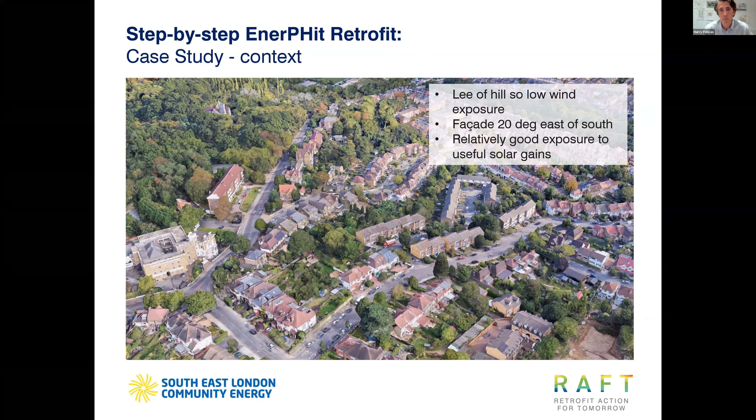There are 3 stories. It was in a poor decorative state. The neighbouring house is lower and staggered, and as I said earlier, the only building regulation requirement was for a little bit of loft insulation. I want to labour this point - I want you to go away from my talk and think about this concept of retrofit ready works.

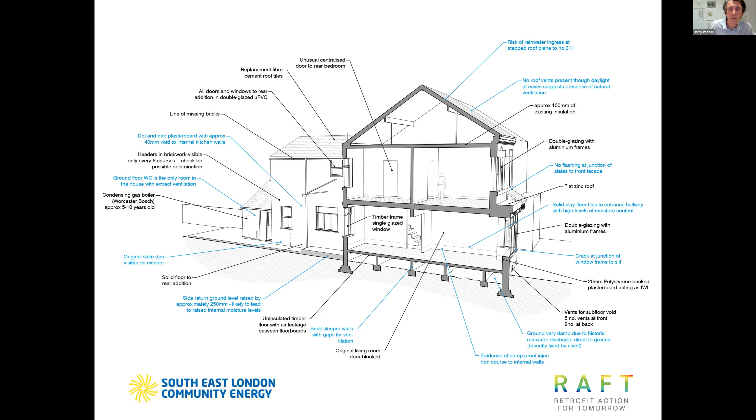And then this is a section of that same project - actually the Bournville retrofit project I mentioned earlier on. So this just shows a preliminary retrofit strategy for the house. It's indicative, a section that shows where insulation will go, roughly how thick it might be, where we might put it, and where difficult junctions are likely to be.

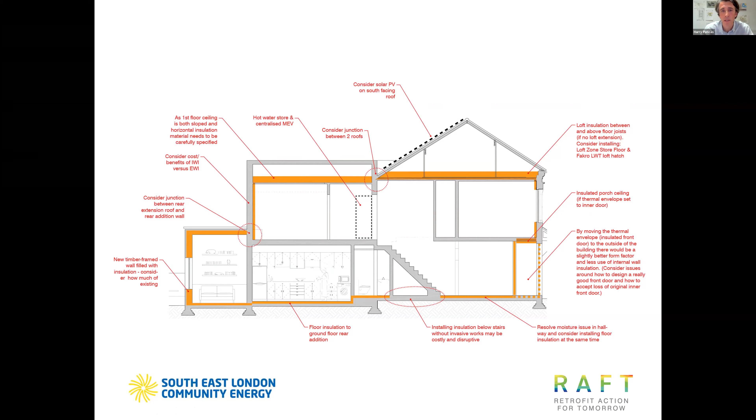Just as a simple thing such as a porch, it's actually quite a challenge. It's quite easy to sort of wrap a box, but a porch actually needs to be insulated on the underside, and then the wall to the inner room also needs to be insulated. So you need to really think it through, and think through junctions and connectivities. Floor to wall and wall to roof insulation details really need a lot of thought.

And it's very heartening to know that after having completed step 3, our measured energy is actually lower than what was predicted by the PHPP. So you might have all heard the phrase 'the performance gap' - it's very common that buildings are designed to do one thing and they actually perform a whole lot worse.

I remember attending an AECB conference a couple of years ago at Oxford Brookes, where the director of estates of Oxford University was talking about their performance gap, and it was something like 200% on buildings built since 1950. I don't remember the exact numbers, but it was a kind of shocking amount. You can imagine they have all these high profile designers and engineers working away, and unfortunately they haven't managed to deliver buildings that perform as they were expected.

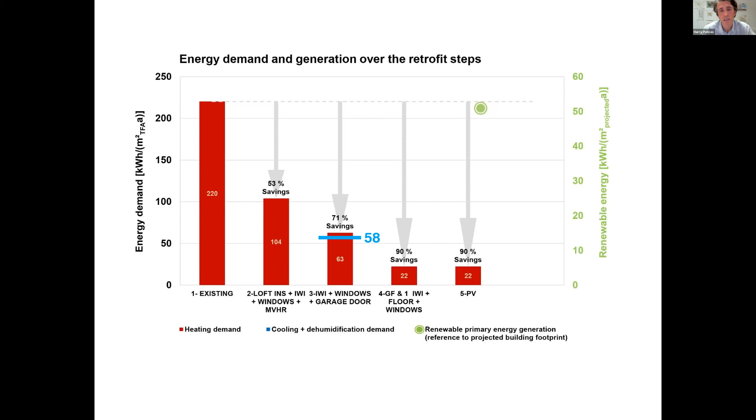So this is very great - this is really great to see that it's performing better than expected.

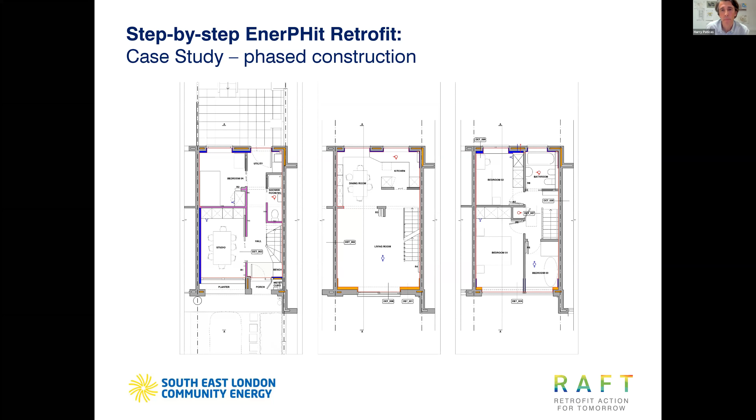And I just thought I'd show you the living room. So the living room is on the first floor, and I just wanted to share the fact that we've got an odd wall - we've got block work, but then we've got this really weird micro cavity. It's a sort of thin little slot that just runs up the building.

And then on the other side, we've got a cavity that runs all the way through. At the back, there is a proper cavity wall, but at the front it's different. I'm saying this for two reasons: first, to make you aware that as much as you might think you know what your building's doing, or even your standard building assessor, there's always going to be little quirks. And if they're not picked up by you, an assessor, or an architect, they definitely should be picked up by the builder during works on site.

I've had the privilege of being able to drill into walls whenever I want and investigate the building. But it's worth noting there is always a quirk. I thought I knew Victorian buildings, but now I know not to rely on previous knowledge, because you often come across something a bit unexpected or unusual.

The other thing I want to mention is that where an external wall meets a party wall, sometimes cavities carry all the way through across, but usually not. Very often the wall goes all the way to the outside.

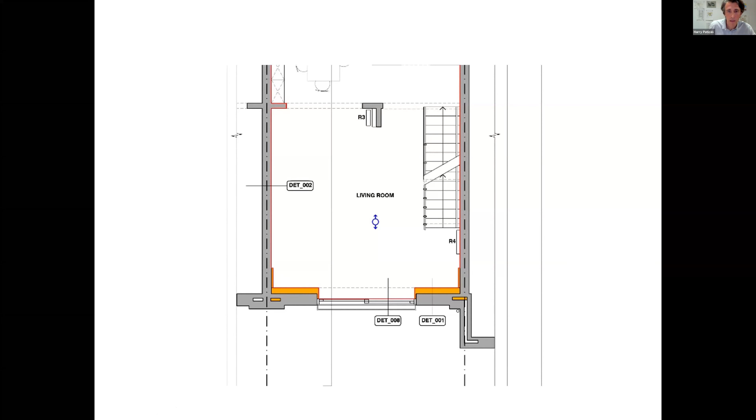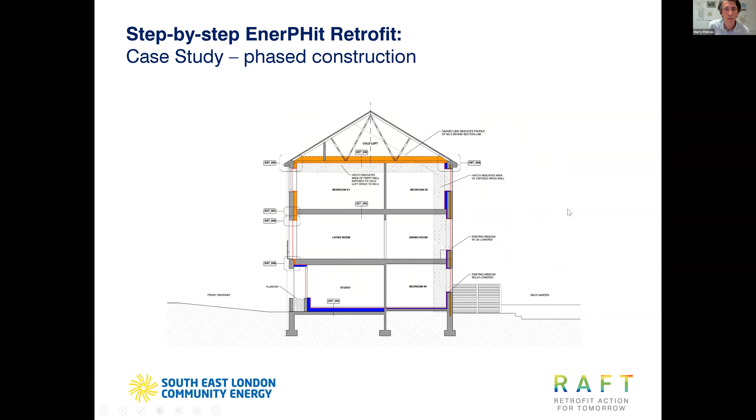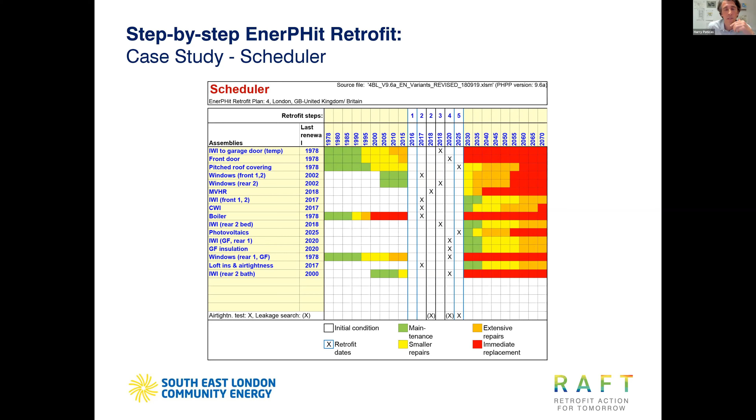And I think we all know that we're in absolutely dire trouble as a planet. It's way worse than any of us can even comprehend, is my view, and we have to do everything we can. And because we all have to do anything we can, I get very worried, because I suddenly think that everybody rushes to solutions, and it's also quite complicated.

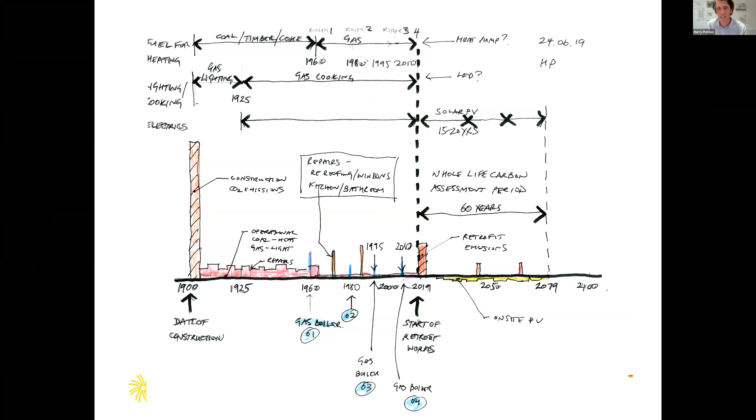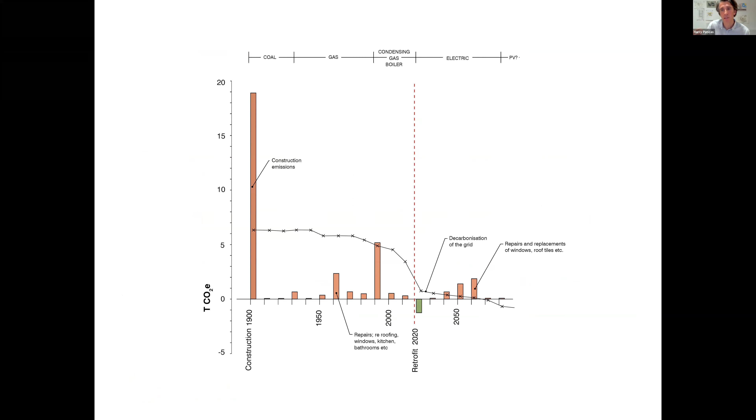So what I wanted to do, I had this thing, and this is like a sketch, yeah? It was like me sort of guessing, but then I tried to actually quantify it properly. So I thought, okay, how many times did they replace the kitchen? How many times did they replace the windows? We actually measured the full carbon history and got a proper quantified graph of that. I don't have time to go into detail on it, but it was a lot of fun to do, and it did help give this deeper history feeling about buildings.

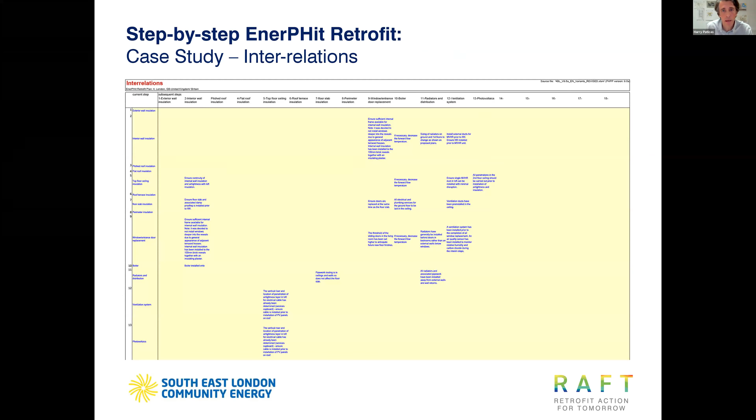So I'd like to talk a little bit about interrelation. There are a number of retrofit measures that we need to think about that have impacts on other measures.

For example, let's say I want to install a mechanical ventilation with heat recovery unit. Well, if I'm going to put one on the wall, I need to make sure that, because I've got the ducts going through the wall, I really want to insulate that wall first, before I put the mechanical ventilation in, because the setting out might not work.

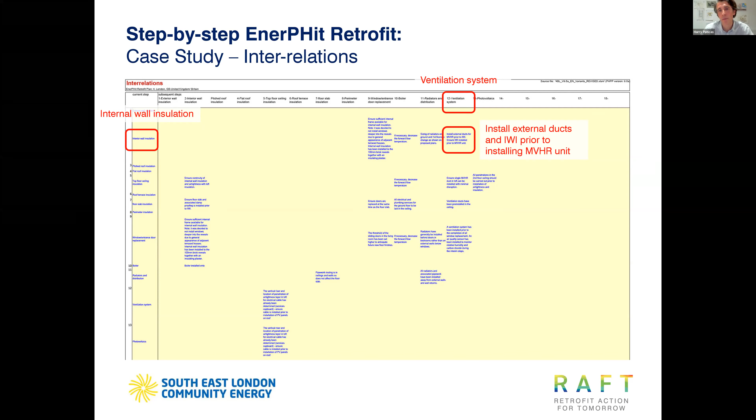I don't know whether any of you have seen—I'm always going to retrofit talks and seeing examples of worst practice—but when people pull out slides of worst practice, you start seeing external wall insulation staggering around a porch that they didn't bother moving, or a gas pipe coming in that nobody coordinated moving so you could insulate behind it. You see all this stuff and it's horrendous—they're all thermal bridges and points of moisture ingress. So we do need to think carefully about the interrelationship between different elements.

We've installed mechanical ventilation with heat recovery in the house. It's a machine about the size of a washing machine. It's basically a piece of magic. It provides wonderful air quality. It filters the air coming in, and it's incredibly efficient—something like 93% efficient. It's kind of hard to comprehend how well it works.

So if it's 0 degrees outside and 20 degrees inside, you can be extracting the warm, moist air from your house, with carbon dioxide in it because you've been breathing. You extract that from your wet rooms—kitchen, bathroom, toilet—and then supply fresh air pulled in from the outside, filtered, through the bottom of the machine where there's a heat exchanger. It's basically a plenum—air passes through. It doesn't mix with the air going out, but the air going out passes by the air coming in, and it transfers about 93% of the heat. So it can be 0 degrees outside, and you're supplying fresh, oxygenated, filtered air at about 19 degrees without heating it—you just pull fresh air in. So it's a very good system, very simple and very robust.

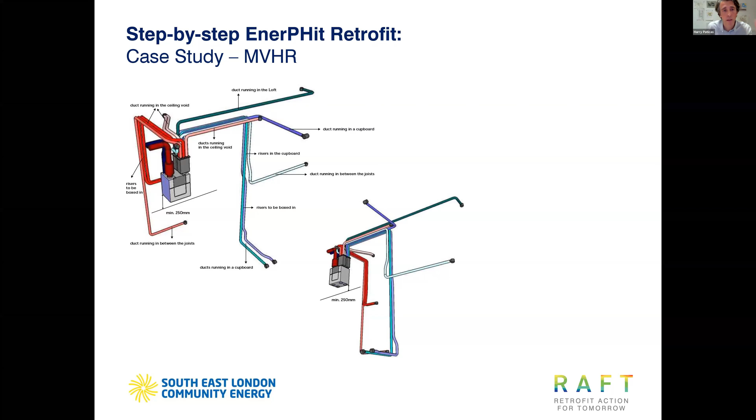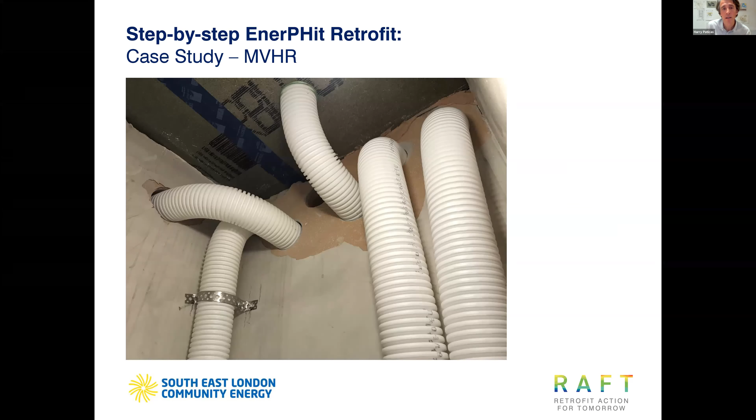So these are a whole series of small pipes, 70 millimeters diameter, that I decided on because I fitted it myself. My wife helped me lift it onto the wall, and we did it all from scratch. So I drilled all the holes, worked out how we were going to fish it through into each room and where it was going to go. It was fun doing and relatively easy actually. I got a little bit of help from my son.

And now it's in, and we've got a really great quality of air in the house. There's a vent above my head that's gradually pulling in fresh air now, and I can say that the carbon dioxide is below 750. I've got a carbon dioxide monitor just here next to me, because I'm always measuring these things, and it's a real pleasure.

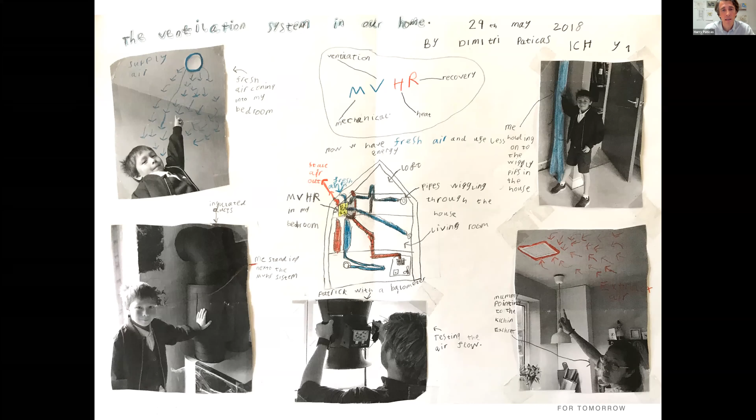This is important. I got my son quite involved in this, and I got him to do posters of all the different things we did on the house. I thought his layout of the pipework was pretty priceless here in the middle - I thought he did a great job there. And this is him pointing to the fresh air coming in. What happened, which is really nice, was that he took these posters into school, and his class teacher got him to present them to the class. So we had this really nice bit of sharing where he could talk about stuff he's doing at home, and his classmates could learn a bit about it.

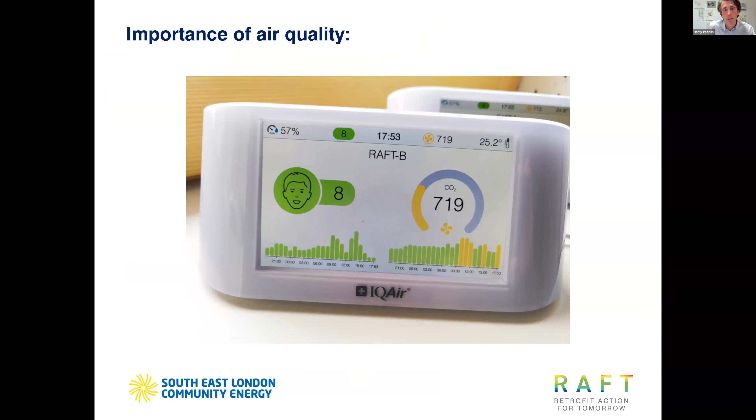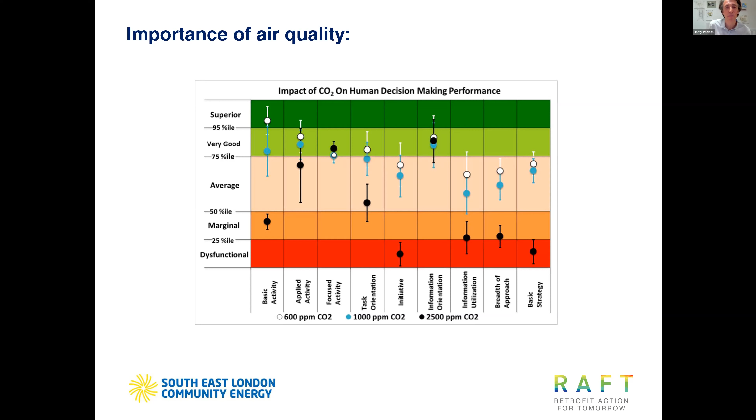This is some real data from a school recently that shows them coming in with nice, good air quality, and boom, there it goes above 2,500 by 11 o'clock. And that actually was a rainy day, so they didn't go out much, and the windows were closed. So it is an issue.

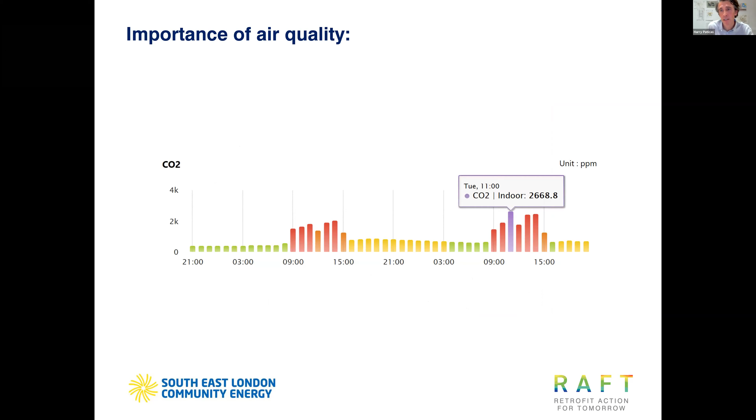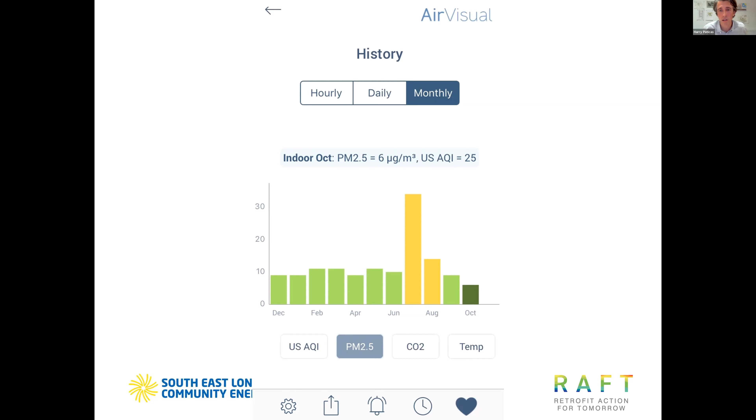We've been monitoring air quality on the streets as well. This graph shows PM 2.5s, and this really, really shocked me. This is our house, PM 2.5s in 2019, and it shows when we had the really big heat wave last July. It shows that we had the windows open a lot for natural cooling at nighttime. Just by doing that, we made the air quality worse because we were bringing in lots of outdoor air. So all this period we had the MVHR on, but the moment we opened up all the windows, the PM 2.5s went up. Now, there may be other variables in this, so you always have to be careful about jumping to conclusions, but it seems pretty clear, that relationship there.

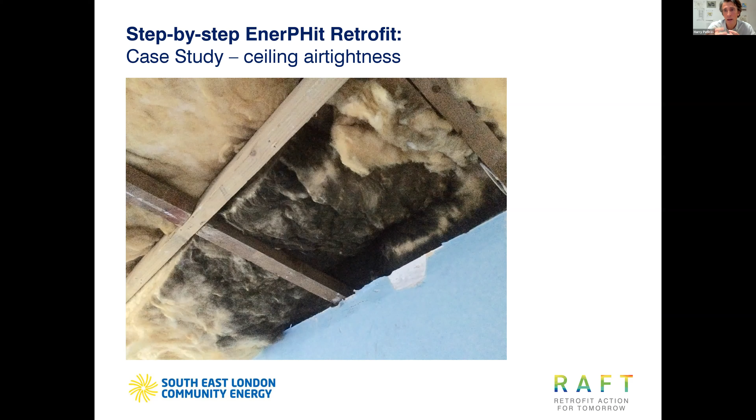It's worth remembering that the way wind moves in a building is that air moves across the top of it, entering the house on the side it blows into. So if the wind is blowing this way, air comes in on this side, then over the roof, creating suction in the roof and on the other wall.

You'll very often find problems on one side of the building, quite often related to orientation and wind direction, because air is being pulled out in those locations. So we pulled all the ceiling out and discovered that the house was built with trussed rafters put up first, then plasterboard, then blockwork walls built up to the plasterboard - an unusual way of building.

Then that gave a real challenge because then we had to.

Hello? It's 7:45, Harry. Just doing your time check.

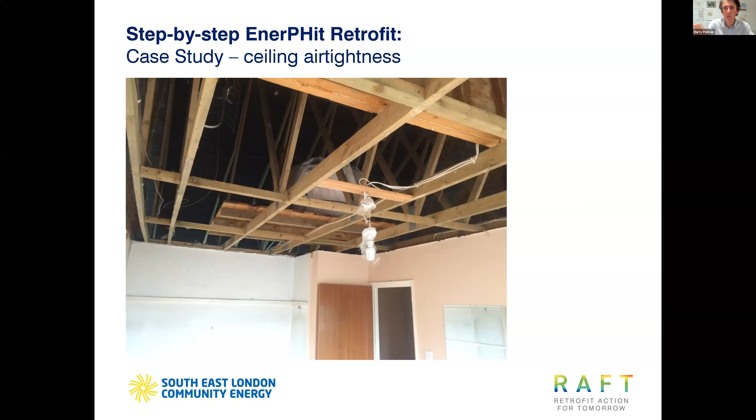So the plasterboard, basically we want to create full air tightness all the way across, wall to wall, and we did that by taping, creating a complete flat square plane that gave total air tightness on the roof. Got some help from this little man.

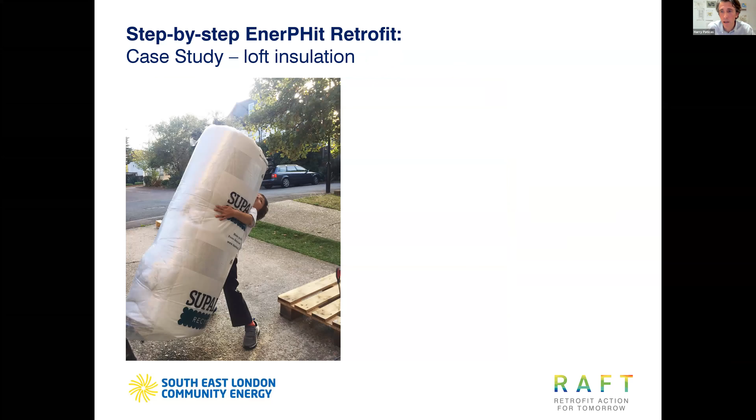We got 350 millimeters of insulation in the loft. I'm going to speed up now because I was getting quite excited there, and I hope it's all been helpful.

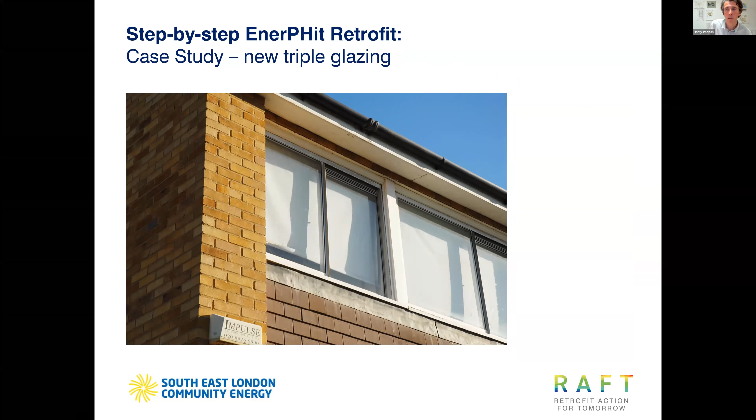So we also put solar shading in. I think we have to think about summer overheating. We could have spent a few thousand pounds on electric blinds, but instead I contacted a sailmaker and we made our own - and they're actually quite beautiful.

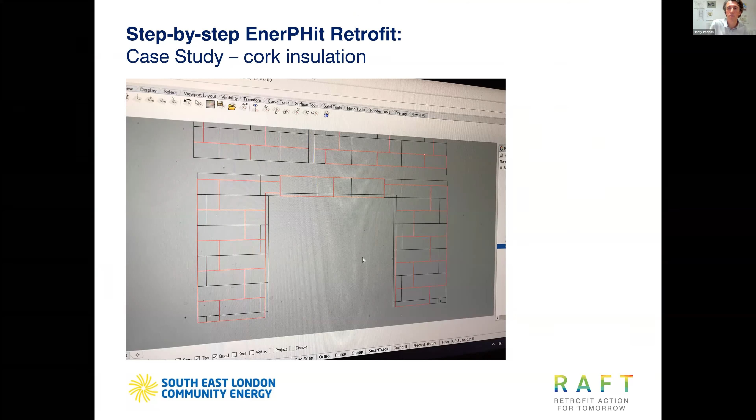We put cork insulation in, and it was very carefully set out to make sure we didn't have joints overlapping, so all the joints are sealed and overlapped properly. I even set it out on the driveway, and I even reused all the pieces of cork.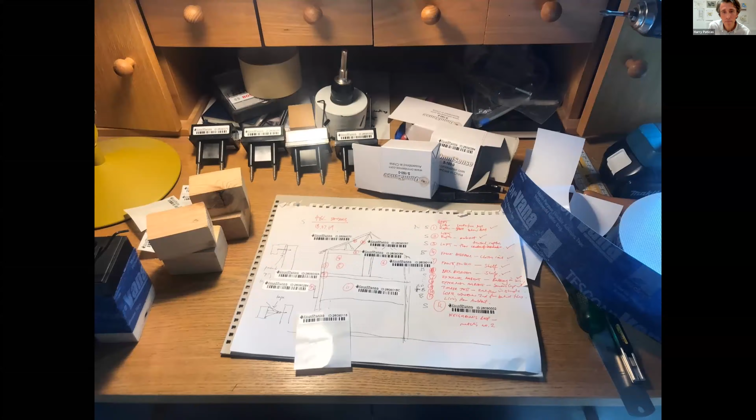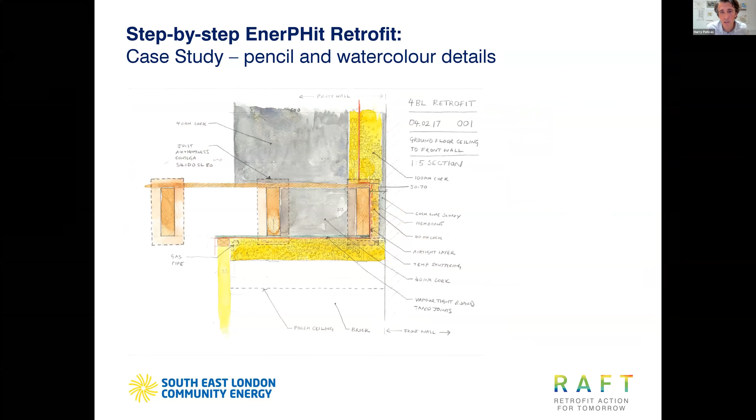We've put sensors in the building - little sensors detecting air quality and moisture levels. We drilled a hole in a wall to put a sensor in, and we've been tracking the hygrothermal performance of the wall. We also did lots of watercolor drawings of the project.

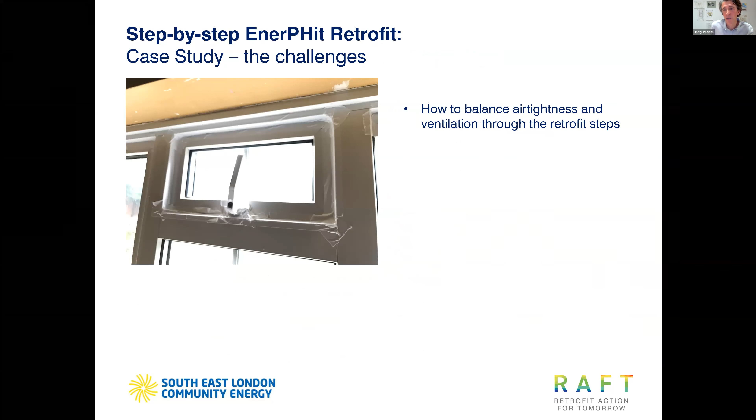I think I'd like to talk about a few challenges - I'd like to talk a little bit about how to balance air tightness and ventilation through the retrofit steps, and I think it's really important to think about how you do that.

It's worth remembering that there are windows with something called a night vent - you can rotate the catch 45 degrees to the side, and it will crack the window open by about 3 millimeters. Depending on the size of the window, you can actually get that to roughly match the trickle ventilation requirement in the building regulations. So that gives you enough ventilation before you've put in a ventilation system - it's a nice little trick, and quite a good interim measure.

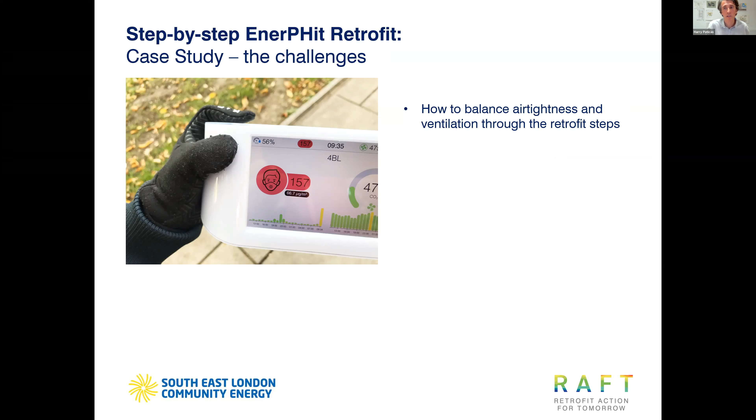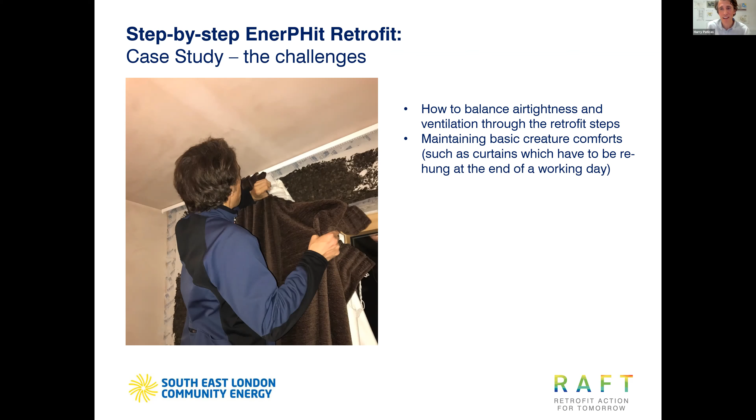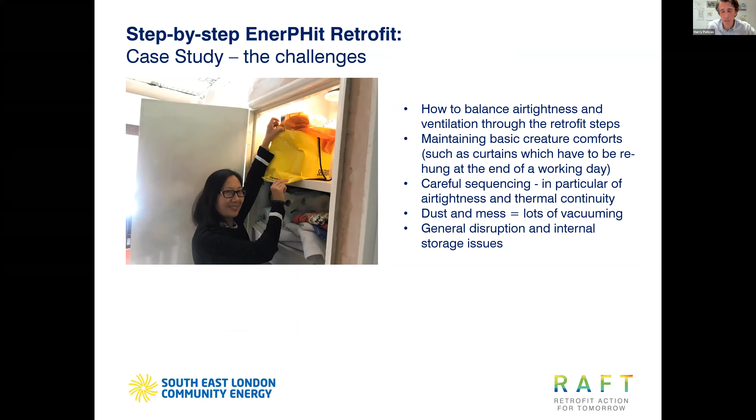It's quite challenging doing it step by step - taking the curtains off, rehanging the curtains, that kind of thing. It needs careful sequencing, and there's a lot of vacuuming when you do it - you do a Sunday's worth of work, you've got to vacuum up. I tried to get my wife to look really grumpy, but she couldn't do it - that was her trying to move things around the house. It can be quite disruptive in terms of storage.

It's frustrating that a lot of the natural insulation materials are not locally available - these did come from Portugal, so there's quite a high transport cost. But actually cork is the lowest embodied carbon insulation material you can use - though not necessarily the lowest when you consider sequestration.

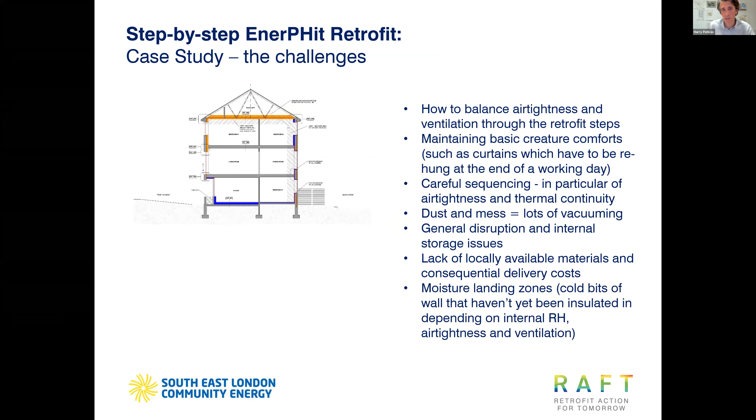Wood fiber is the lowest when you consider sequestration, but in terms of getting the raw material, cork is the lowest. And then we need to think about moisture landing zones, cold bits of wall that haven't been insulated that become a risk. I think it needs to be borne in mind.

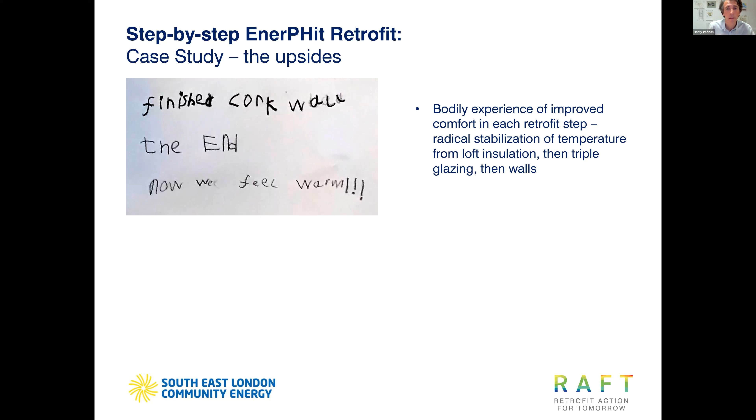There is something beautiful about retrofitting your home. You feel really, really comfortable. It's really lovely. You get better air quality. You can be nearer outside walls. It doesn't feel cold or drafty. It's lovely to get close to materials. So I do advocate giving it a try yourselves.

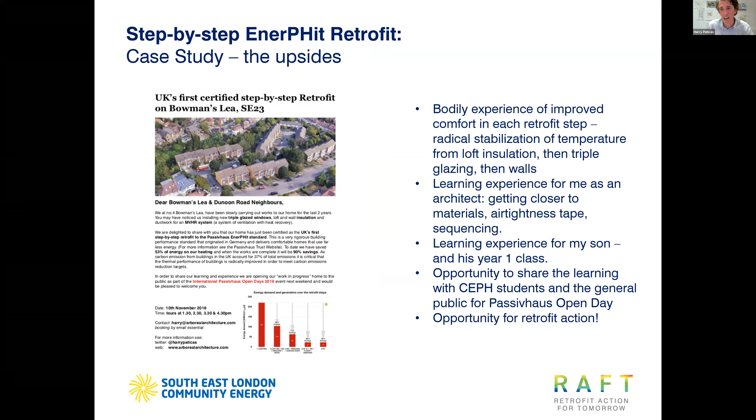It was a great learning experience for my son. I've also shared the house. I've had lots of people from Passivhaus training courses, and also had the house open for open day. We've also leafleted the local area to say, come on, have a go, retrofit your home. That was a lot of fun.

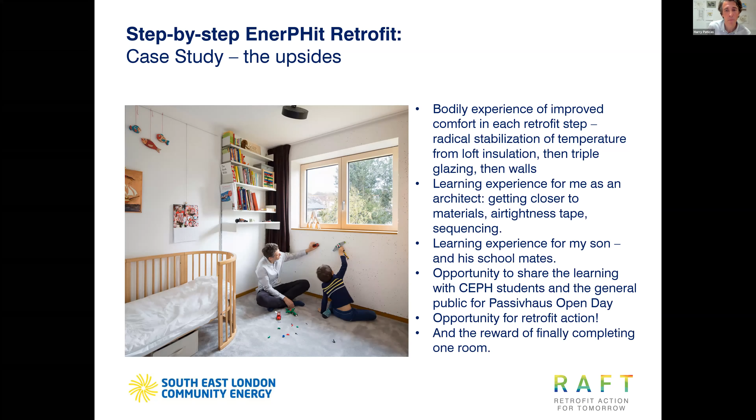We also completed a room, which feels really comfortable. We got into Grand Designs magazine, which was nice. So they're also thinking that it should be aspirational to retrofit your home.

This is just a little zoom out, just to say, look, we've got to do all of this. Oh, there's so much to do.

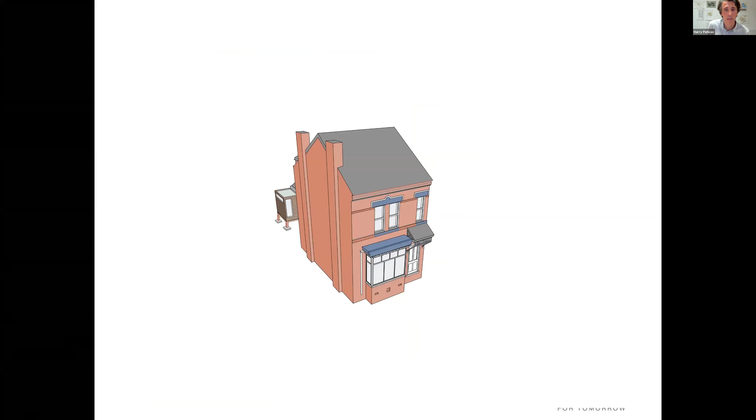I'm going to whiz through this because I really want to show you something very important, which is about RAFT. I know it's frustrating to not be able to see everything, but time is calling. So very quickly, I want to tell you about RAFT. RAFT stands for Retrofit Action For Tomorrow.

It is my mission to try to make a deeper impact on reducing carbon through retrofit. I spoke to a head teacher once who said that she felt she could influence 5,000 people through being a head teacher at a school. I think that says a lot in terms of what kind of engagement you can get from children and from school communities around the built environment.

I just think children don't think they can change the built environment, and I think they should feel that they can. So I've basically been taking children into boiler rooms at schools and following the heat from the radiators through the pipework back to boilers, helping them understand building fabric much better.

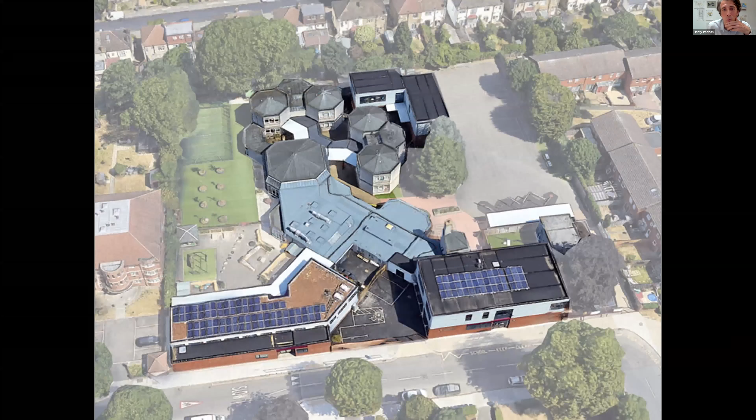So we developed a little exercise called the Baked Potato Challenge, where they used insulation materials to keep a baked potato warm. We've been retrofitting the school. We just held a zero carbon assembly and had the Mayor of Lewisham and Janet Daby MP attend. This is the school; the orange are the poorly performing buildings.

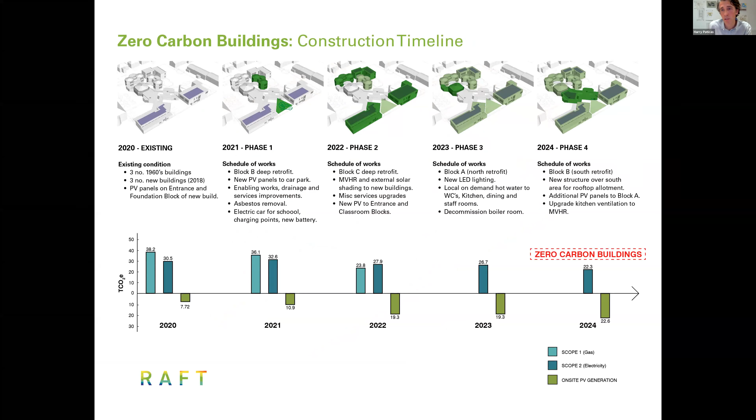We've produced a zero carbon timeline. We're going to produce zero carbon buildings by 2024, and then a zero carbon school, which is scope 3 — meaning all the transport and all the food and everything else — by 2030. We produced a series of cartoons to help explain the ideas.

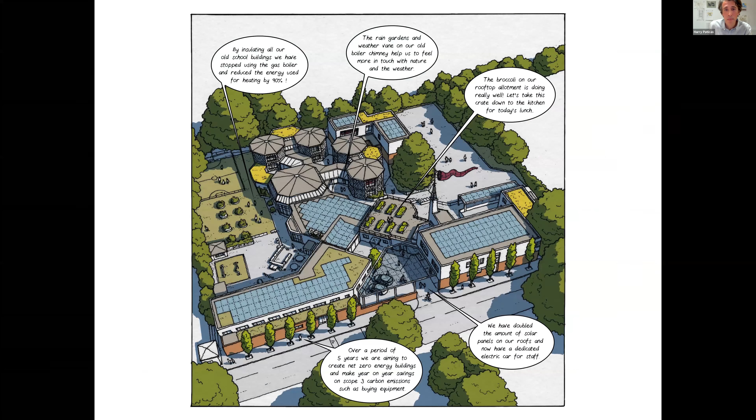And then finally, there's a link that I hope Nadia is going to send you, which is a link to two films. If you want to watch the assembly, it's the film on the right. But if you just have 4.5 minutes, you can watch a lovely film made by a friend on the left, about some of the workshops we did with the children. So that's it — sorry, I had to rush through a bit there. Look forward to hearing some questions.

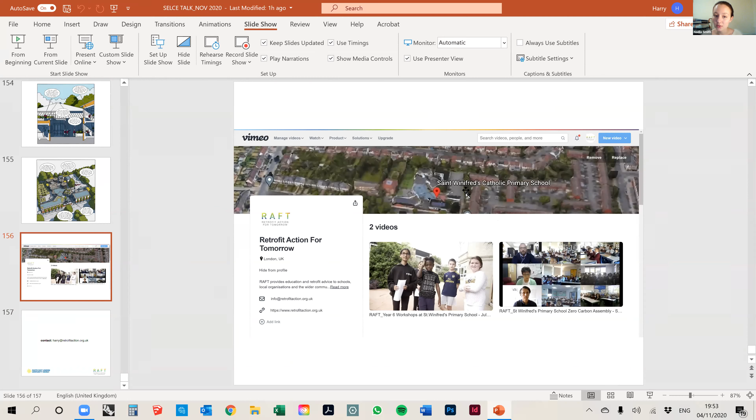So just to go through the questions that we've got. Both Kathy and Tanuja were asking about people outside of Southeast London. Kathy said she's applied for the Green Homes grant and contacted the contractors on the website, but they're all massively overbooked and no one's offering retrofit coordination or an advice service. Are there other community energy groups in West London that can support her? Tanuja also wanted advice for people outside South London. I would really recommend looking on the Community Energy London website, where you can find what group is local to you.

And if you're outside of London, I would say look at Community Energy England's website because they have a list of groups as well. And of course, there are people like Harry from Retrofit Action For Tomorrow who gets involved in this space, our previous speakers as well, Nick Parsons and James Traynor. You'll find their contact details on the presentation slides that we had, so you can get in touch with them.

But Patrick had a question for you, Harry. It was quite a specific question, so I don't know that you'll be able to get to it right at the minute, but if you do get a chance, maybe you can reply to him later. He was saying that you mentioned cutting energy demand by about 80% in the 1840s semi-detached house, and he wanted to know what the final consumption of that house was in kilowatt hours per square meter per year. But if you don't have it on your slides, then maybe you can get in touch with him.